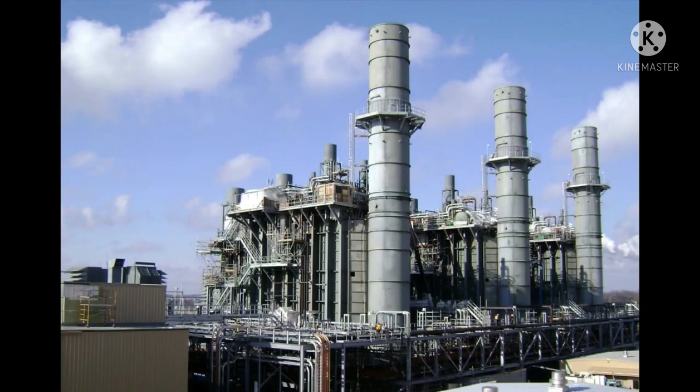A gas power plant is a thermal power station which burns natural gas to generate electricity. A gas power plant, or natural gas power plant, works on the Brayton cycle to generate electricity. Natural gas plays a big role in generating electricity. This type of plant is more flexible for power generation and more efficient per ton of fuel.

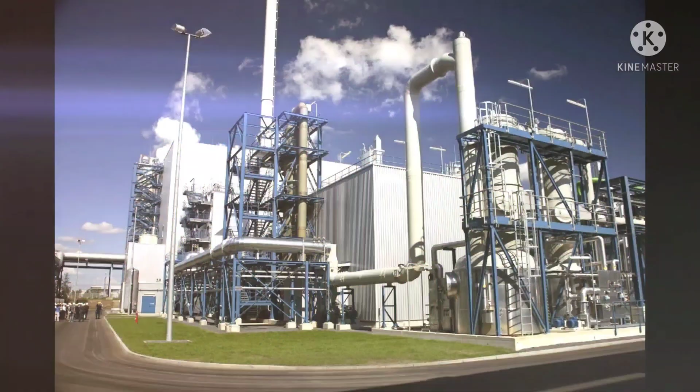Today, electricity plays a very important role in running the world. We need it for lighting our homes, schools, factories, towns, shopping malls, and public places. Electricity is also used to run industries, railway stations, metros, airports, cinema halls, air traffic control, and construction sites, etc.

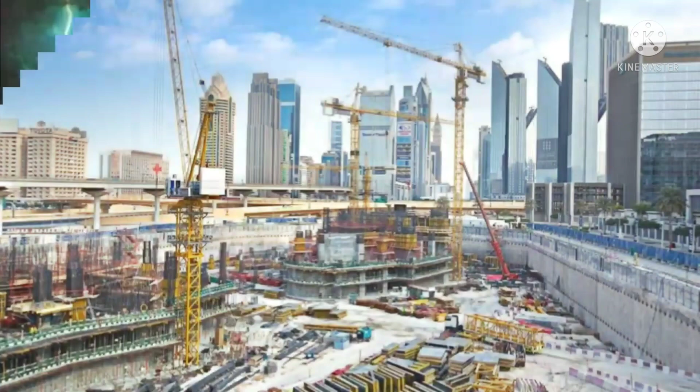Electricity generated using natural gas turbines was first produced for public use in 1939 to 1940 at a plant in Neuchâtel, Switzerland, by Brown Boveri.

The total installed capacity of gas-based power plants in India is 17,706 megawatts. Gas power plants generated 7.21% of India's electricity.

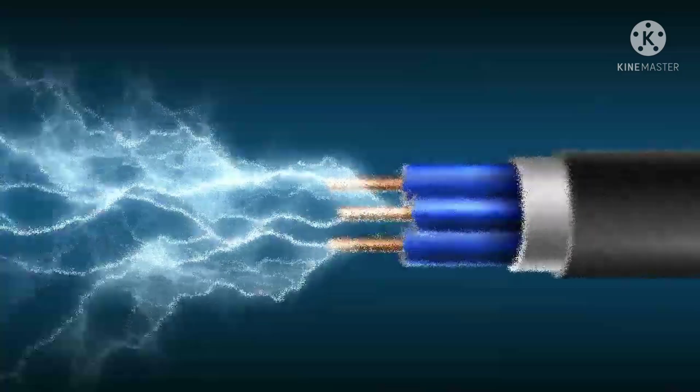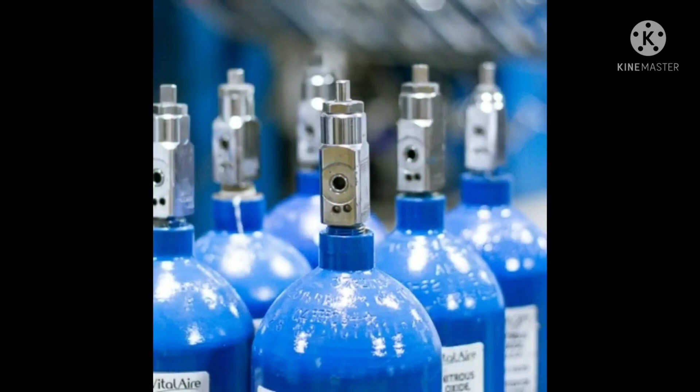A gas-fired power plant, or natural gas power plant, is a thermal power station which burns natural gas to generate electricity. Natural gas power plants generate a quarter of world electricity, and a significant part of global greenhouse gas emissions like carbon dioxide, methane, nitrous oxide, ozone, and water vapor. It is a type of fossil fuel power plant in which chemical energy stored in natural gas, mainly methane, is converted successively into thermal energy, mechanical energy, and electrical energy.

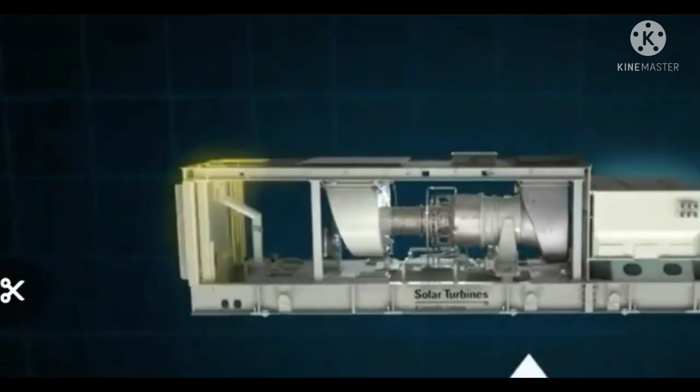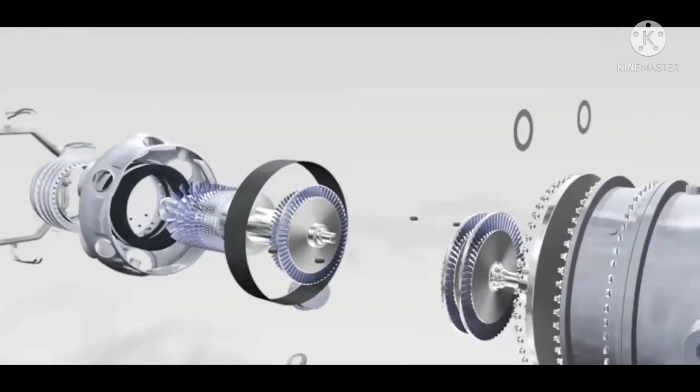All natural gas power plants use a gas turbine. Natural gas is added along with a stream of air, which combusts and expands through the turbine, causing a generator to spin a magnet, making electricity. The turbine drives a synchronous generator which produces the electric power. Because the turbine normally operates at very high rotational speeds of 12,000 rpm or more, it must be connected to the generator through a high ratio reduction gear, since generators run at speeds of 1000 or 1200 rpm depending on the AC frequency of the electricity grid.

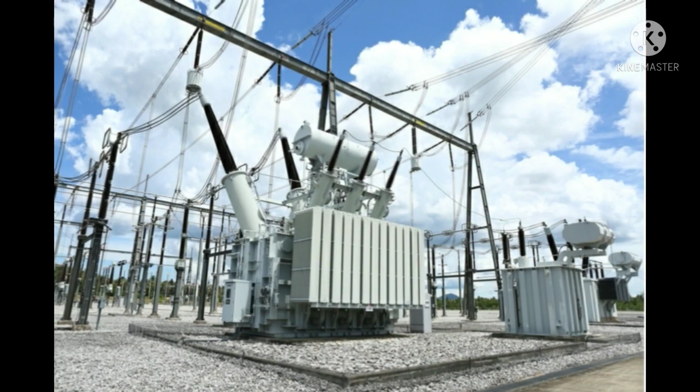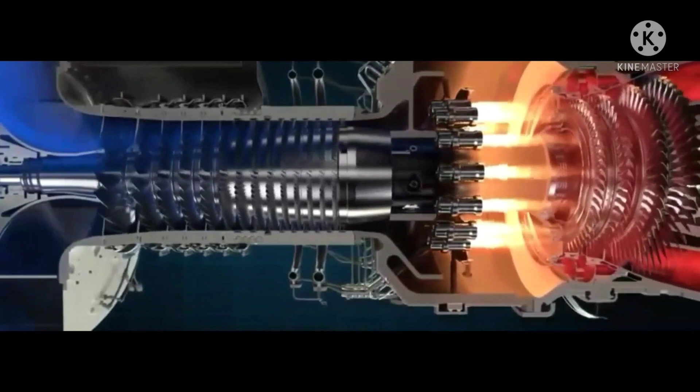Gas turbines have three main parts. Number 1, the compressor takes in air from outside the turbine and increases its pressure. Number 2, the combustor burns the fuel and produces high pressure and high velocity gas. Number 3, the turbine extracts the energy from the gas coming from the combustor.

There is waste heat that comes from this process. Some natural gas power plants use this waste heat as well. There are two types of natural gas power plant: simple cycle gas power plant, and combined cycle gas turbine power plant.

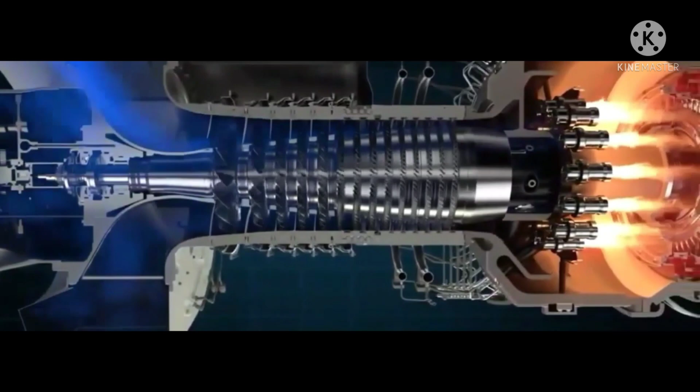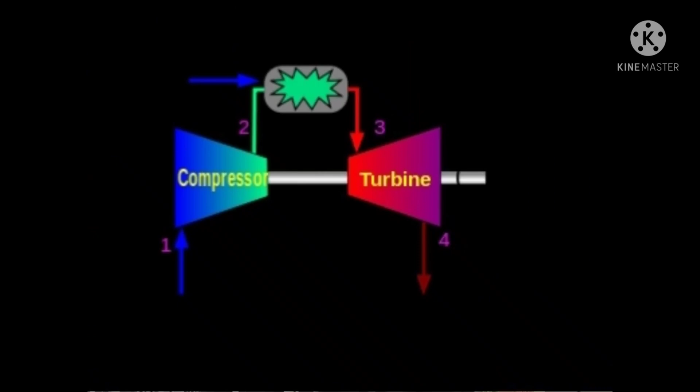Simple cycle gas turbine power plant, also known as open cycle gas turbine power plant, uses hot gas to drive a gas turbine to generate electricity. This type of plant is relatively cheap to build and starts very quickly, but has lower efficiency. Simple cycle gas turbine power plants are able to dispatch faster than coal-fired power plants. They are turned on or off faster in order to meet society's electricity needs often needed on the grid.

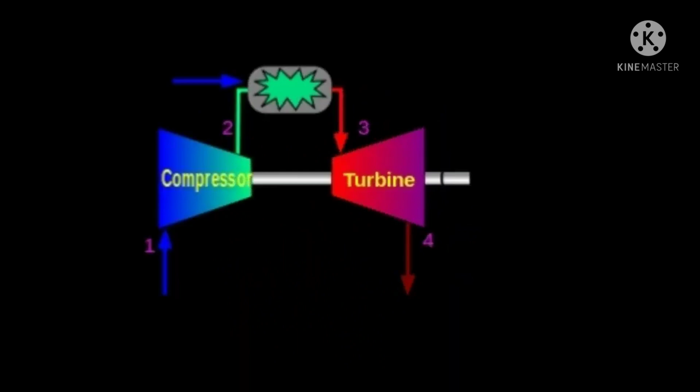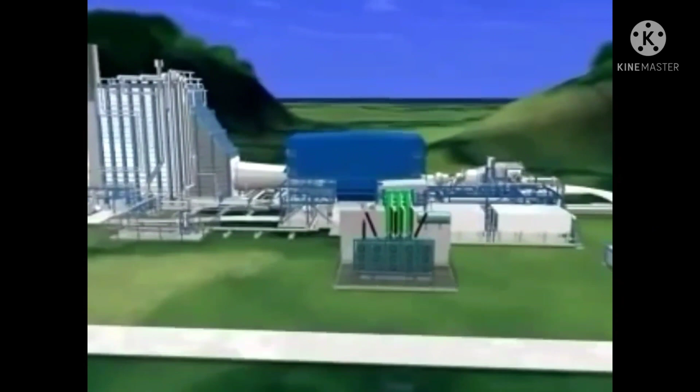Fluctuating electricity needs of society are known as peaking power. Combined cycle gas turbine power plant consists of a simple cycle gas turbine, which uses the Brayton cycle, followed by a heat recovery steam turbine and generator, which uses the Rankine cycle. The most common configuration is 2 gas turbines supporting 1 steam turbine.

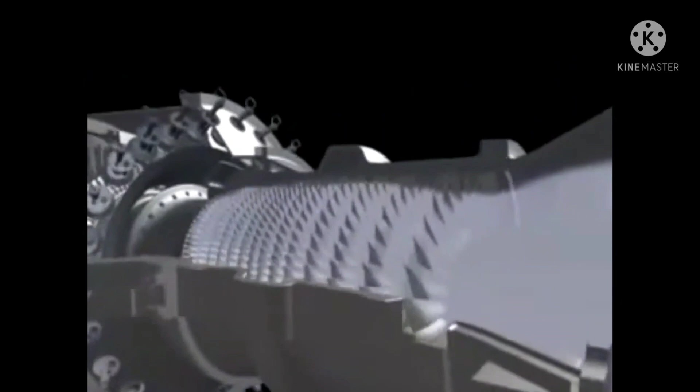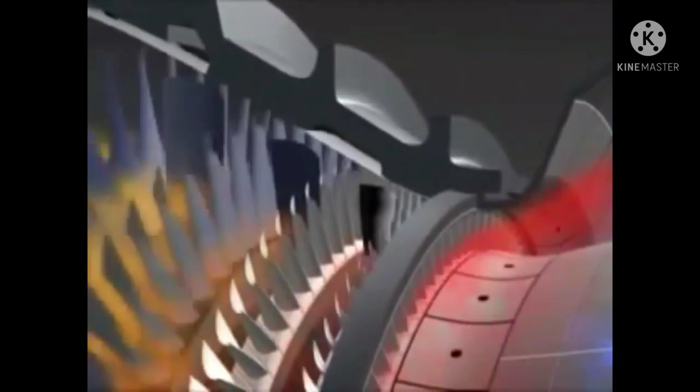They are more efficient than simple cycle plants and can achieve efficiency slightly over 60%, with dispatch times of around half an hour. It makes use of the hot exhaust gases that would otherwise be dispelled from the system. These exhaust gases are used to boil water, converting it into steam, which can then spin another turbine and generate electricity. This is more efficient. These plants produce 1/3 of the waste heat of plants with 33% efficiency, like coal and nuclear power plants.

Burning natural gas produces fewer pollutants like nitrogen oxides, sulfur dioxide, and various gases and particulate matter than coal. On the other hand, natural gas plants have significantly higher emissions than a nuclear power plant. This means air quality tends to improve, reducing smog, when switching to natural gas plants from coal plants. But nuclear power does even more to improve air quality.

Despite the improved air quality, natural gas plants significantly contribute to climate change. On the other hand, the process of getting natural gas from where it's mined to the power plant leads to considerable release of methane. As long as natural gas plants are used to produce electricity, their emissions will continue to warm the planet in dangerous ways.